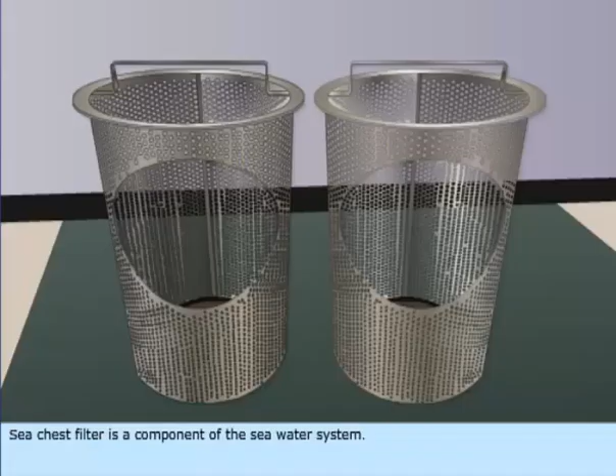In this media, we are going to learn about sea chest filters in the ship. Sea chest filter is a component of the seawater system.

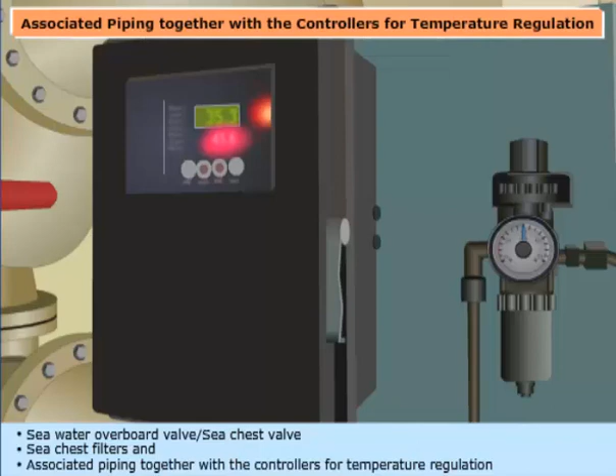The major components of the seawater system are cooling water pumps, heat exchangers or LT coolers, seawater overboard valve or sea chest valve, sea chest filters, and associated piping together with the controllers for temperature regulation.

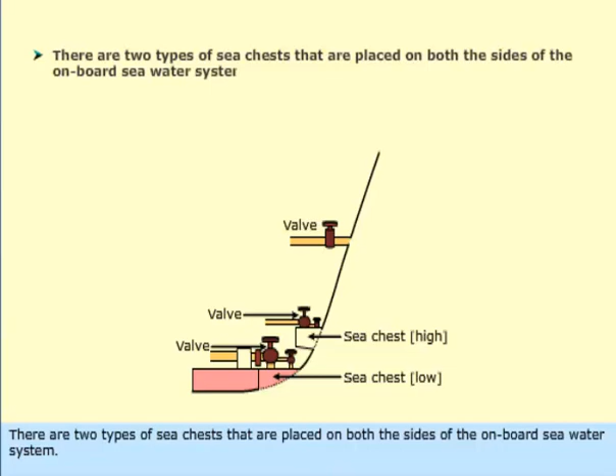There are two types of sea chests that are placed on both sides of the onboard seawater system. Based on the height and depth at which they are installed on the ship's hull, they are named high sea chest and low sea chest.

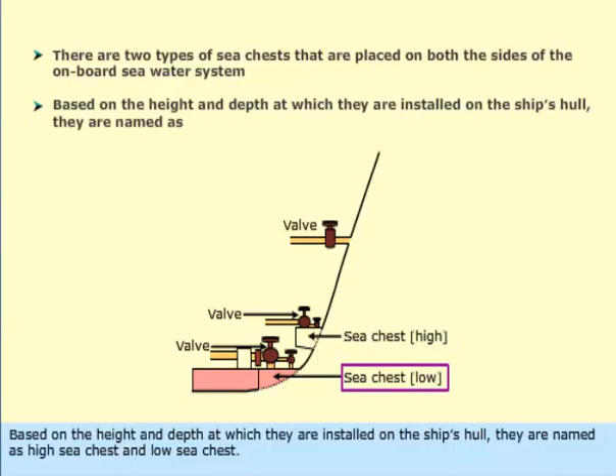It is normal that on many ships, if the high sea chest is installed on the port side of the vessel, the low sea chest is installed on the starboard side, or vice versa.

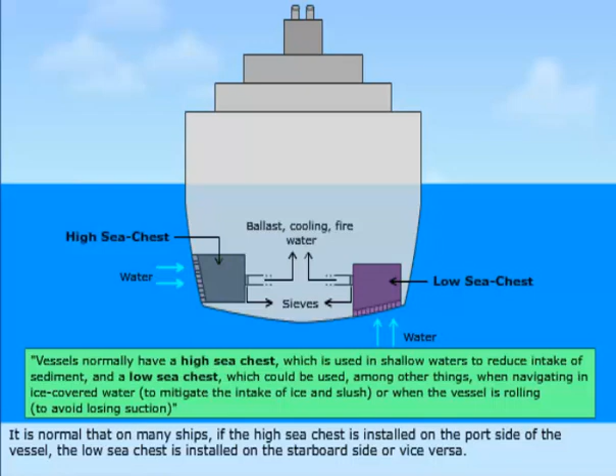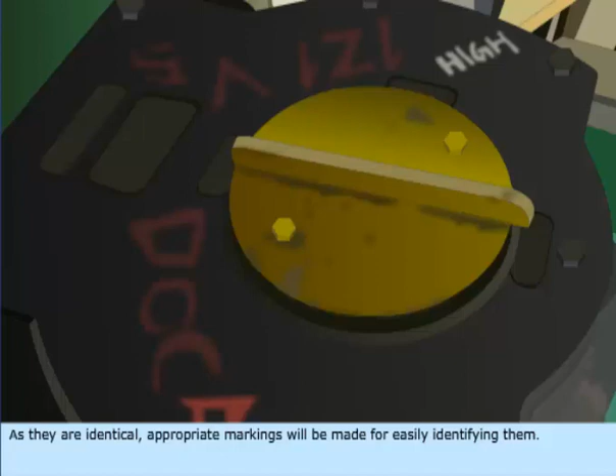The manual isolating valves before and after the high and low sea chest filters are as shown. As they are identical, appropriate markings will be made for easily identifying them.

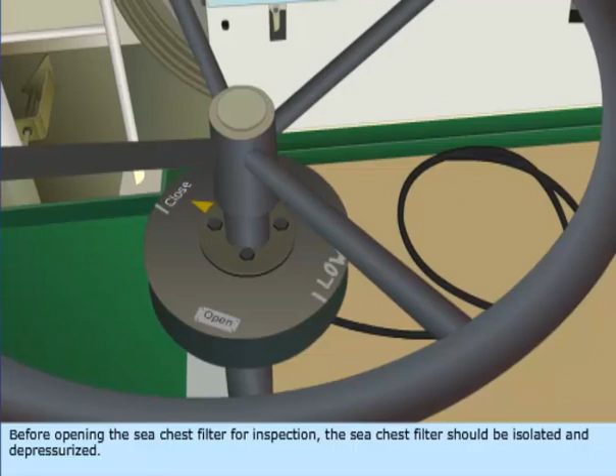Before opening the sea chest filter for inspection, the sea chest filter should be isolated and depressurized. Here, the high sea chest valve is in open condition and the low sea chest valve is in closed condition.

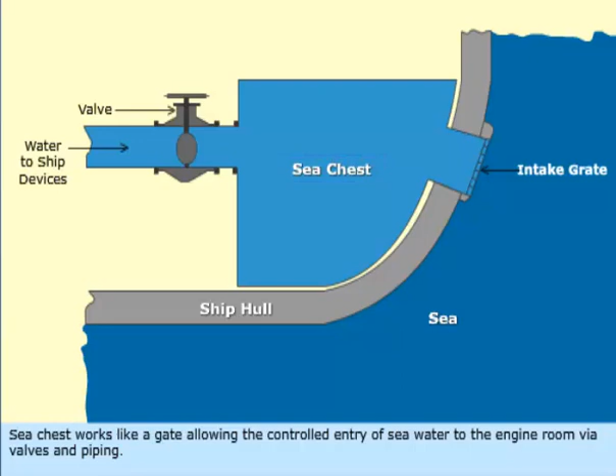Sea chest works like a gate allowing the controlled entry of seawater to the engine room via valves and piping. But a lot of unwanted marine organisms like fish, plankton, shells, etc. will also come together with the seawater.

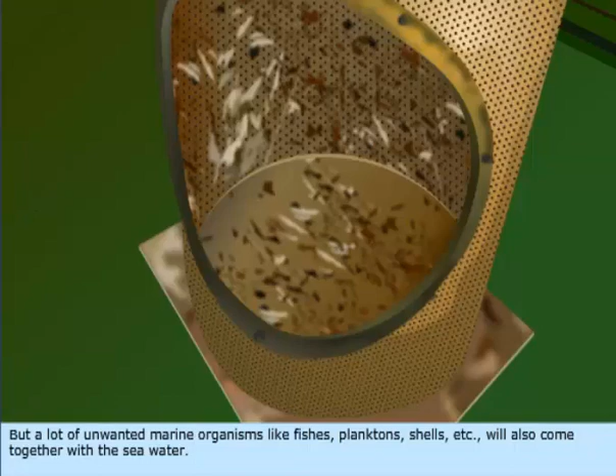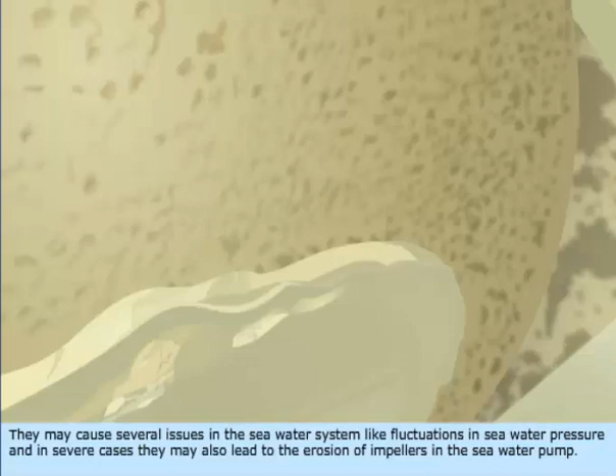They may cause several issues in the seawater system like fluctuations in seawater pressure, and in severe cases they may also lead to the erosion of impellers in the seawater pump.

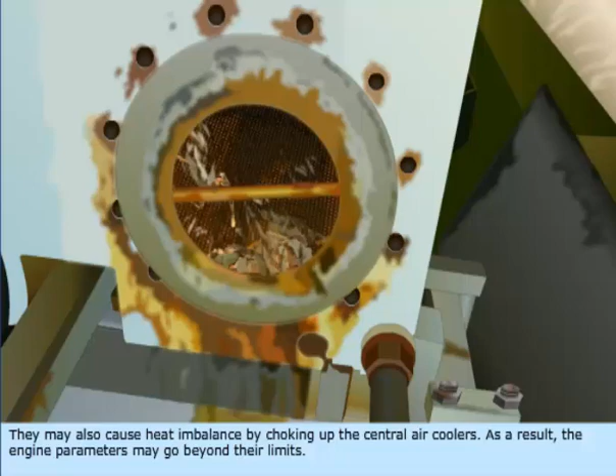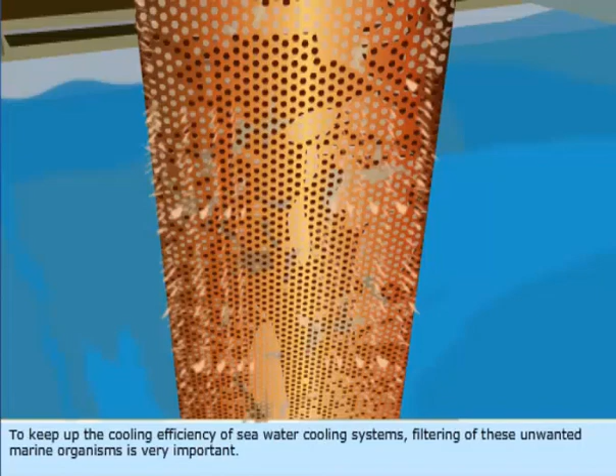They may also cause heat imbalance by choking up the central air coolers. As a result, the engine parameters may go beyond their limits. To keep up the cooling efficiency of seawater cooling systems, filtering of these unwanted marine organisms is very important.

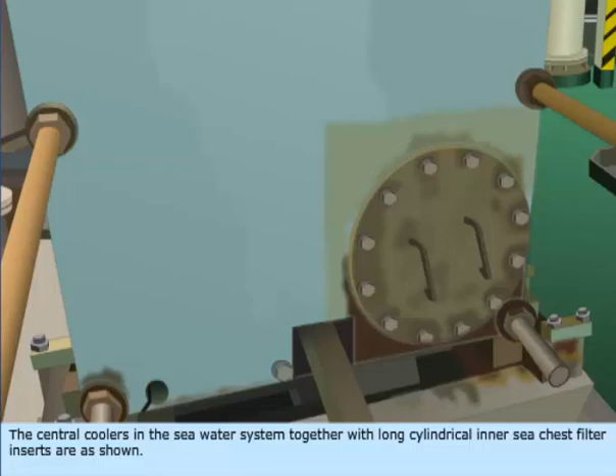The central coolers in the seawater system together with long cylindrical inner sea chest filter inserts are as shown.

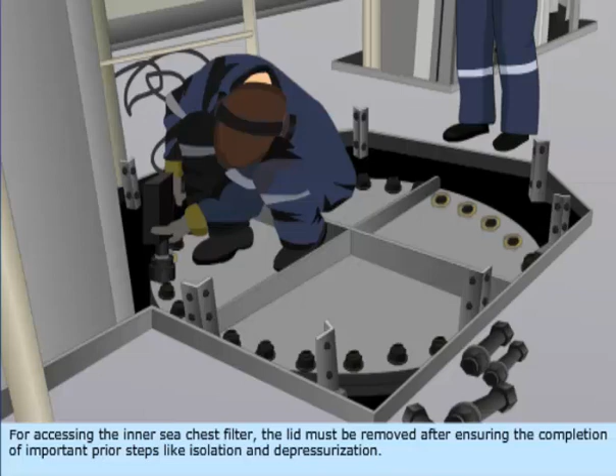For accessing the inner sea chest filter, the lid must be removed after ensuring the completion of important prior steps like isolation and depressurization.

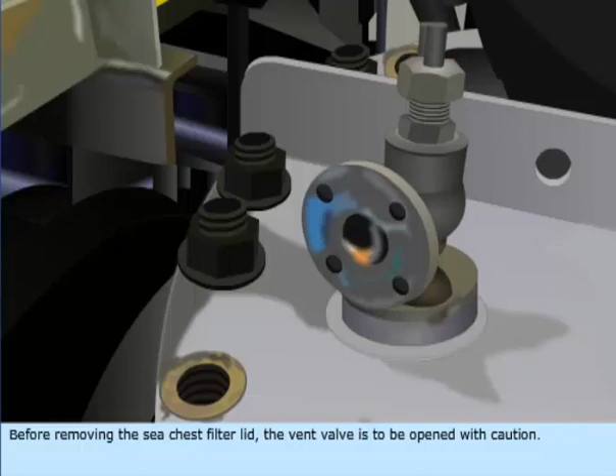Before removing the sea chest filter lid, the vent valve is to be opened with caution. If there is no water coming out from the vent valve, it is confirmed that the depressurization process and valve isolation are carried out successfully.

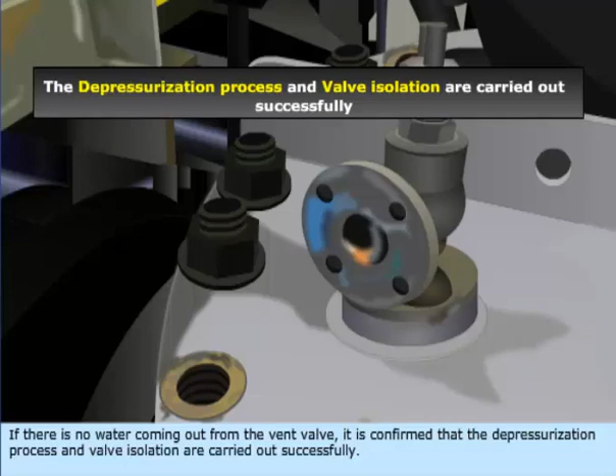Note that it is possible that the section before the vent valve connection to the lid may be blocked internally with debris, and the vent valve check alone is not foolproof. Hence, the procedure given below with precaution is adopted.

Switch off the power and disconnect the cables to anodes if the system is fitted with Marine Growth Prevention System (MGPS).

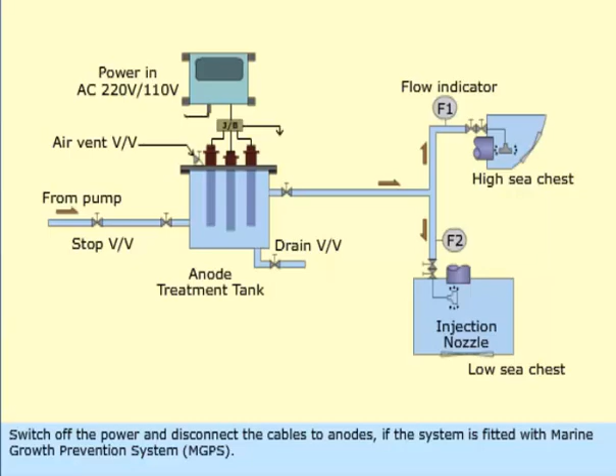Remove all nuts and bolts securing the sea chest lid except 4 bolts and nuts placed diagonally opposite to each other at 90 degrees.

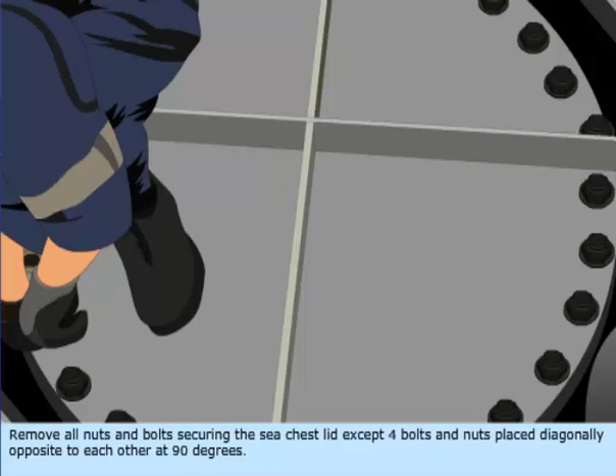Slacken these 4 bolts and nuts placed diagonally opposite to each other at 90 degrees with caution and at the same time lifting the lid with the help of chain hoist.

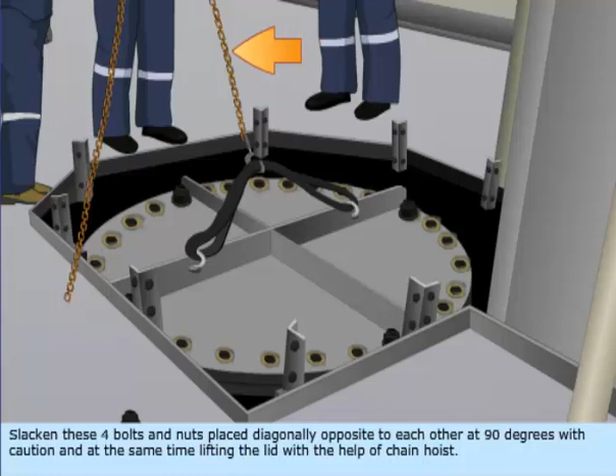It is very essential to confirm that there is no water leaking after lifting the lid off slightly with the chain hoist as above. It is safe to proceed further for cleaning after this confirmation.

Lower the lid back with the chain hoist. Remove the 4 bolts and nuts placed diagonally opposite to each other at 90 degrees.

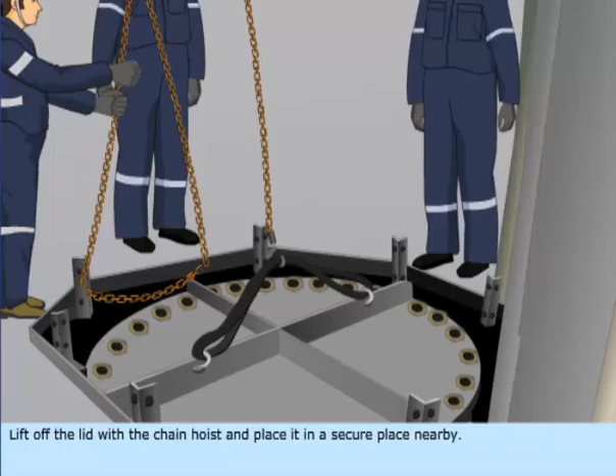Lift off the lid with the chain hoist and place it in a secure place nearby. Pay attention as not to damage the anodes if MGPS anodes are fitted on the lid.

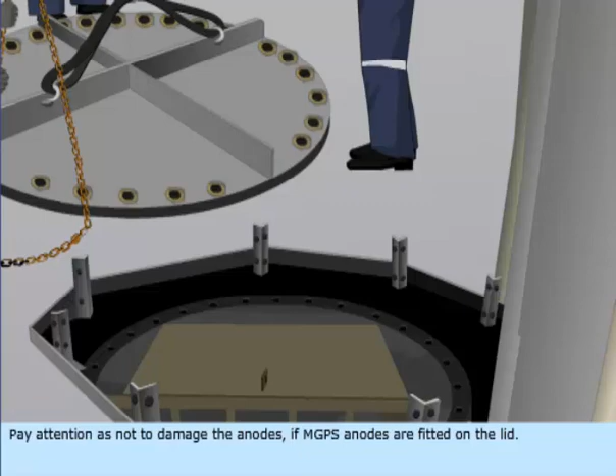For marine growth prevention, sacrificial anodes may be installed in the seawater system based on the design of the sea chest filter lid. In some ships, separate sea chests are incorporated for marine growth prevention systems, or MGPS.

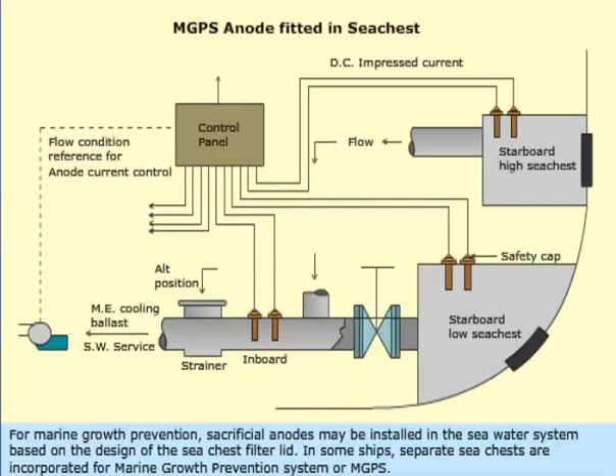In the seawater system containing MGPS sacrificial anodes, the next step is the recovery and cleaning of filters. Even though the filter designs vary, the concept of retrieval and cleaning remains the same.

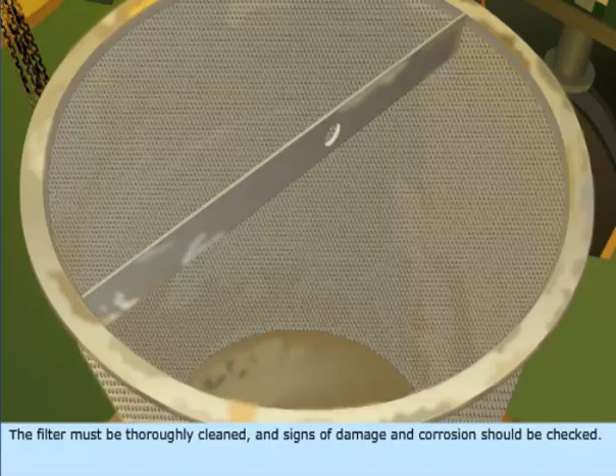The filter must be thoroughly cleaned and signs of damage and corrosion should be checked. If sacrificial anodes are fitted, after analyzing their condition they should be replaced with a new one, if needed.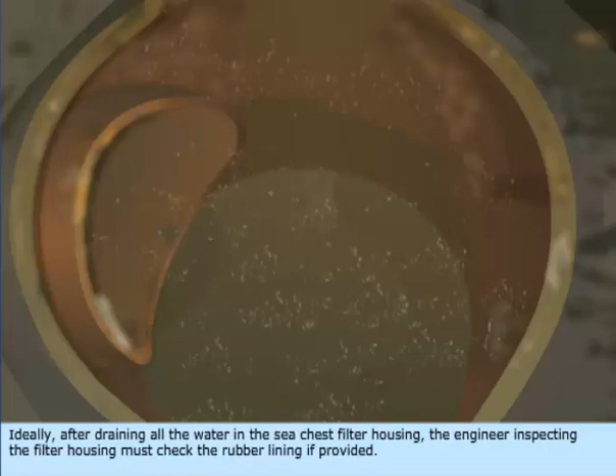Ideally, after draining all the water in the sea chest filter housing, the engineer inspecting the filter housing must check the rubber lining, if provided.

If no rubber lining is provided, inspection is carried out for condition of coating and the other symptoms of corrosion, wear and possible damages.

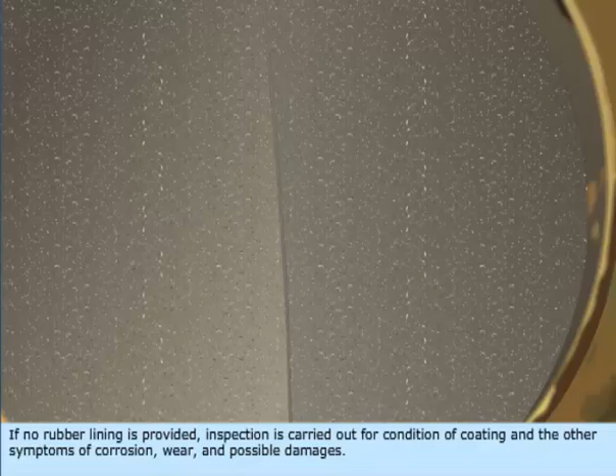Once the cleaning of sea chest filter is done, put the filter back, close the lid, and secure with nuts and bolts.

Proceed to open the manual isolating valves before and after the sea chest filter. Ensure there is no leakage around the filter housing.

Then, the vent valve is to be opened to purge out air from the sea chest filter housing. Close the vent valve after purging is completed.

If everything is satisfactory, either resume this cleaned filter back for use or keep it on standby.

The officer who carried out the inspection must write down and record all his findings in the biofouling management plan for future reference if MGPS is fitted.

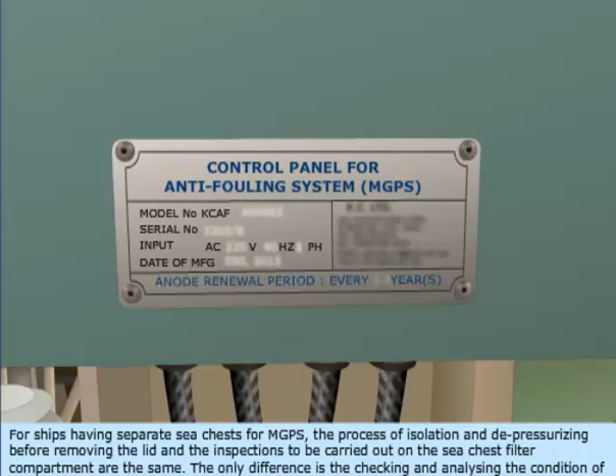For ships having separate sea chests for MGPS, the process of isolation and depressurizing before removing the lid and the inspections to be carried out on the sea chest filter compartment are the same.

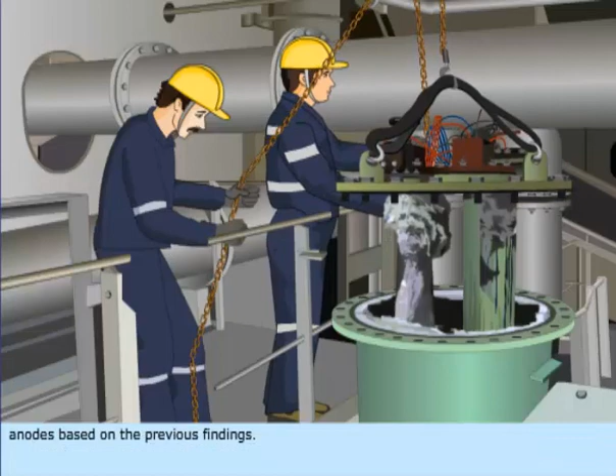The only difference is checking and analyzing the condition of anodes based on the previous findings. Too high or too low anode erosion indicates the possibility of fault in current settings.

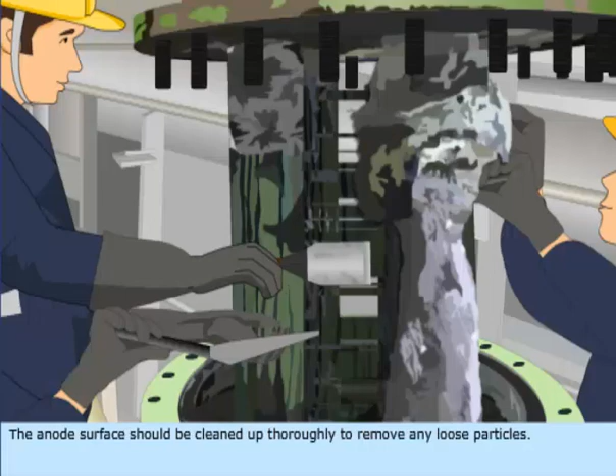The anode's surface should be cleaned up thoroughly to remove any loose particles. The length of the anodes should also be checked.

The anodes of length 20 to 25 centimeters, 8 to 10 inches, on the exposed anode surface area with proper current settings is adequate to last for a maximum of 3 months.

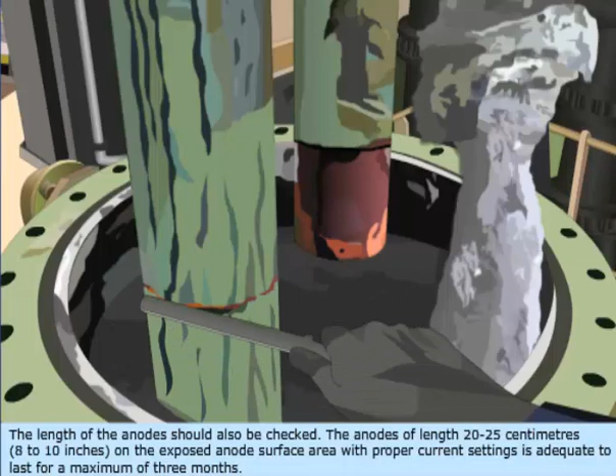A new anode will have a rubber heat shrink tube which should not be completely removed before installing. You must remove only a small part of the tube, that is 20 to 25 centimeters, 8 to 10 inches, from the bottom, and then it can be installed.

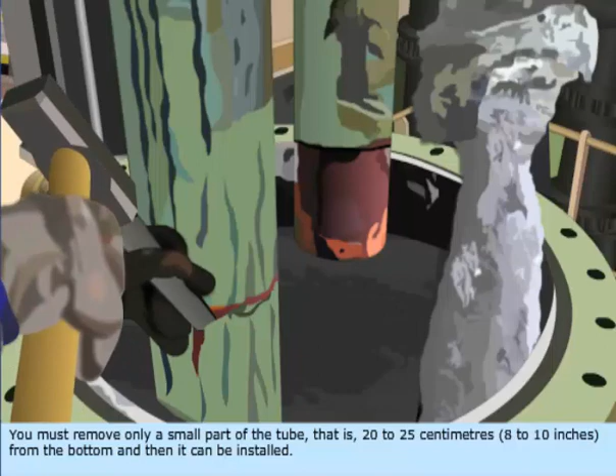If the entire rubber heat shrink tube is removed, the anode will erode from the nearest point where current is applied, that is, from the top, and results in a bottleneck. This may lead to breaking and wastage of the anode material, which defies its purpose.

Once the new anode is properly installed and the conditions are satisfactory, the lid of the individual sea chest for MGPS can be placed back in the reverse sequence of opening it. Thus we have learned about sea chest filter in ship.